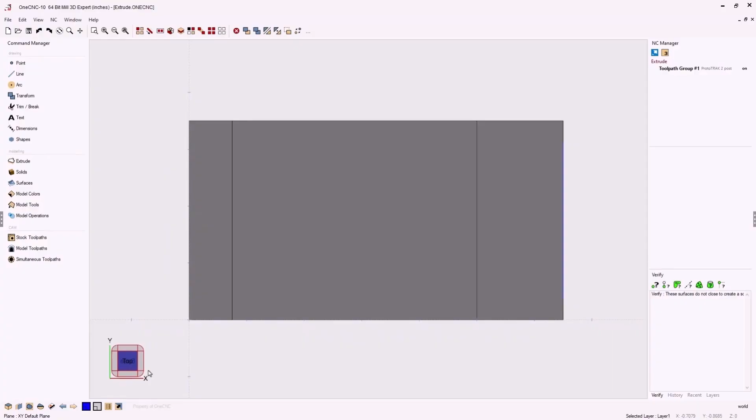All right, so we're starting off with a solid model, and if we look over here on the right-hand side, you can see that we have some wireframe geometry. Now, the goal here is to create an extra solid model and then join those solid models together so that we end up with a part that looks like this.

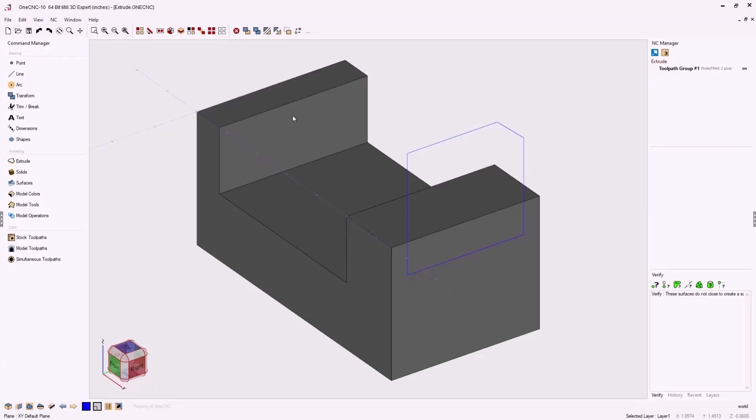All right, so I'm going to show you two different workflows so that you can create this solid model. The second workflow is going to be a little bit more efficient. So let's start with the first workflow.

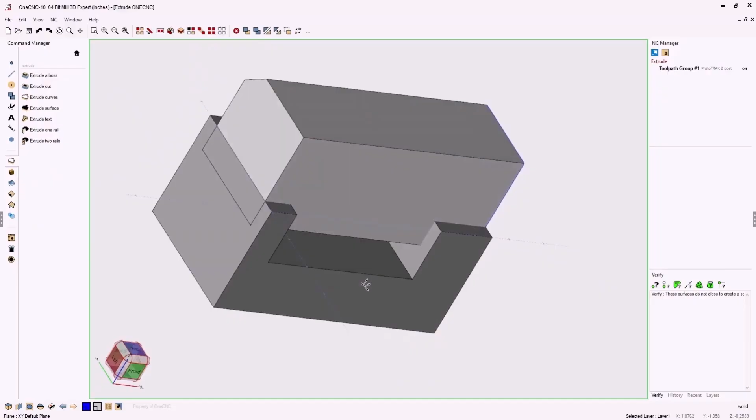I'm going to head over here to the command manager, and I'm going to select the extrude tools, and I'm going to use this option called extrude curves, and we're going to left click the boundary and right click. And then don't forget, you can always digitize vertices on an existing solid model to specify the thickness of the extrusion.

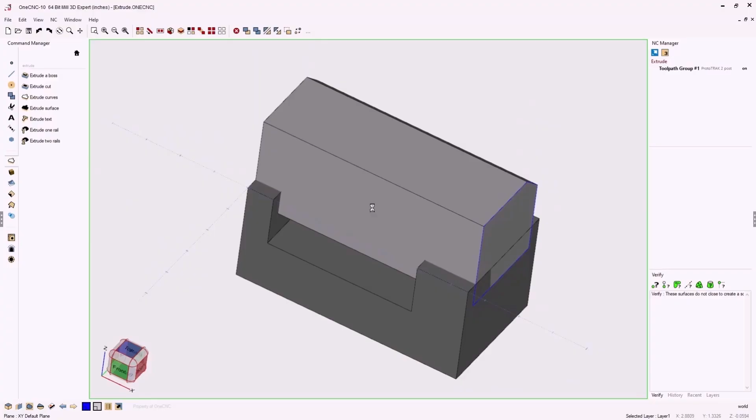All right, that looks pretty good, but you can see right away that the problem we have here is that we have two separate solid models. And because of that, we're not going to be able to create these fillets on the outside or the fillets up here on the inside. So the next step is we need to union both of these solid models. So I'm going to hit the letter S on the keyboard for select, left click and left click.

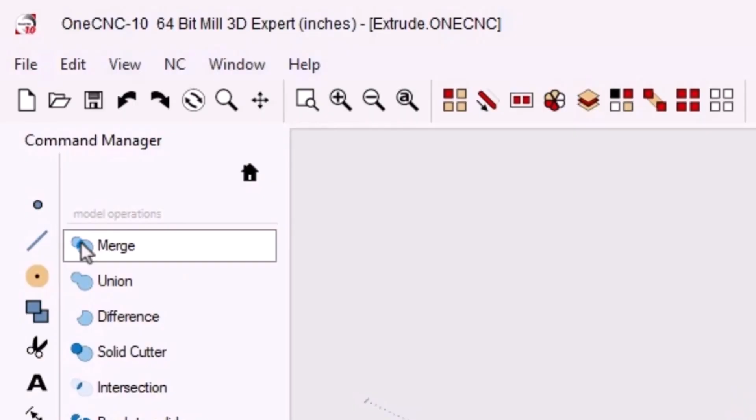Let's head over here to our model operations, and you have two options. You have merge and union. I wouldn't suggest using merge, because if you use merge, you're still going to have that inside geometry. And that's why this little icon has this dark blue area right here in the middle. It's showing you that even though we merge these two together into one solid model, you're still going to have these original surfaces on the inside.

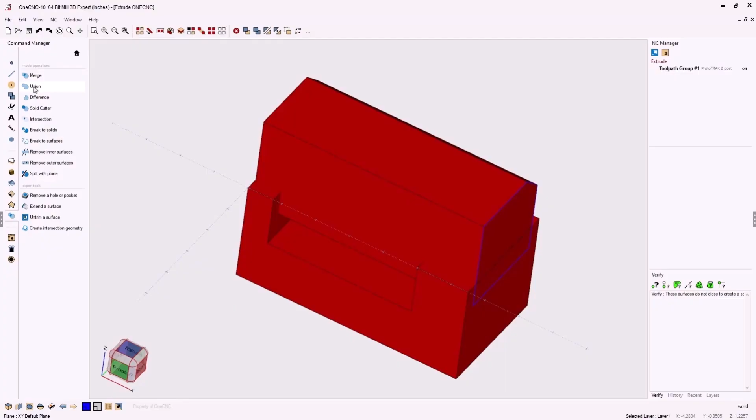Whereas union will union both solids into a single solid model, but it will get rid of that inner geometry. So that's what we want. I'm going to left click that. Very good. So now this is one solid model.

And by the way, you can always verify that by going into your verify tools, and over on the right, the second option from the far right, click that, take your cursor and left click, and you can see that OneCNC is telling us that is a solid model. But more importantly, notice that it says region 1. You want to make sure you only have one region. That means that it's a nice, clean solid model without any intersecting surfaces on the inside. Okay, so solid model, region 1, that looks great.

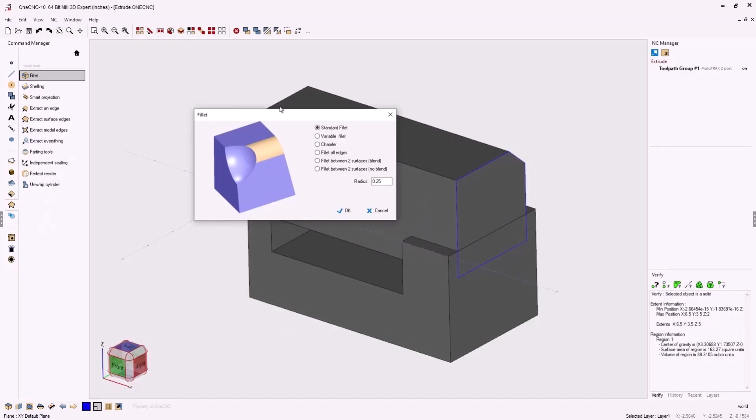Now we can create our fillet. So let's head back over to the command manager, go into our fillet tools. We're going to be making 250 thousandths radius fillets. So I'm just going to carefully left click these 8 edges. We got an edge there, and an edge there, and then right click, and there is our part. Okay, very good. So that's one way that we can create the solid model.

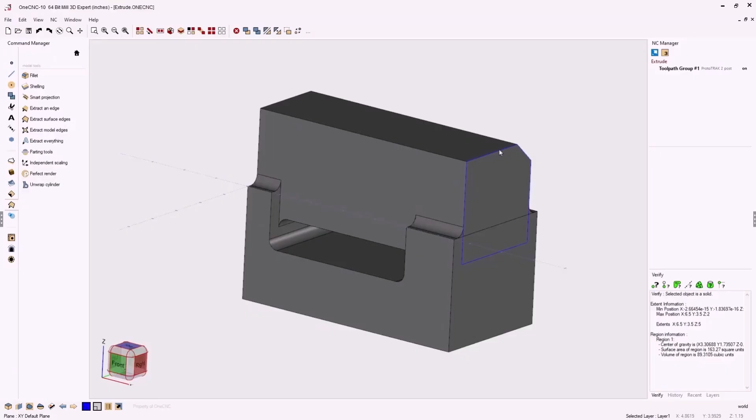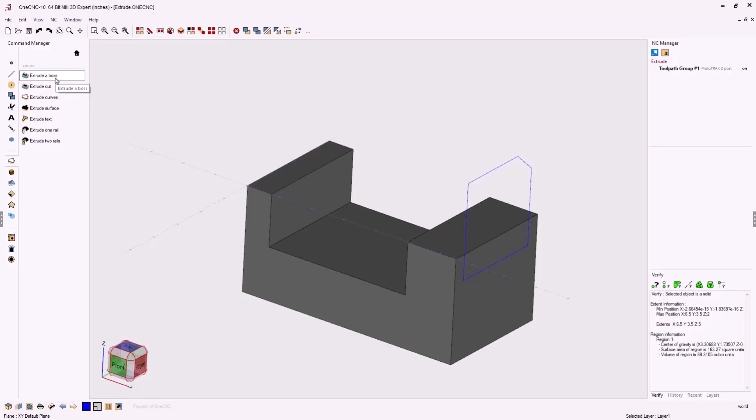Let me show you a little bit more efficient way of doing this. I'm going to hit Control Z to get back to where we started from. So again, we're going to extrude this wireframe geometry, but this time, instead of using extrude curves, we're going to use extrude a boss. Why? Because extrude a boss will not only extrude the geometry, but it will join those solid models together into a single solid. So let's go extrude a boss, left click, same thing.

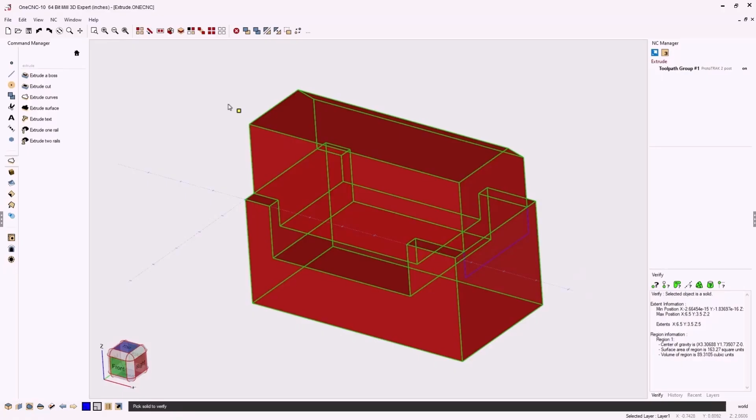I'm going to digitize a vertex to get the thickness and right click, and that's it. That is now a single solid model. We can verify that. It's a single solid model with one region. So we can now just quickly go inside of our model tools, go to our fillet command, and again apply our 250 thousandths fillet. So by using extrude a boss, that's going to give you a more efficient way to join solid models together while extruding the geometry at the same time.

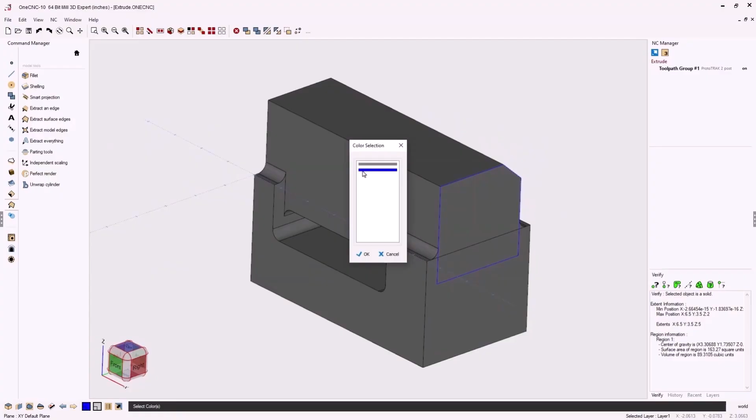We don't need the blue geometry, so let's select by color, and we're going to select all the blue geometry and just hit the delete key on the keyboard.